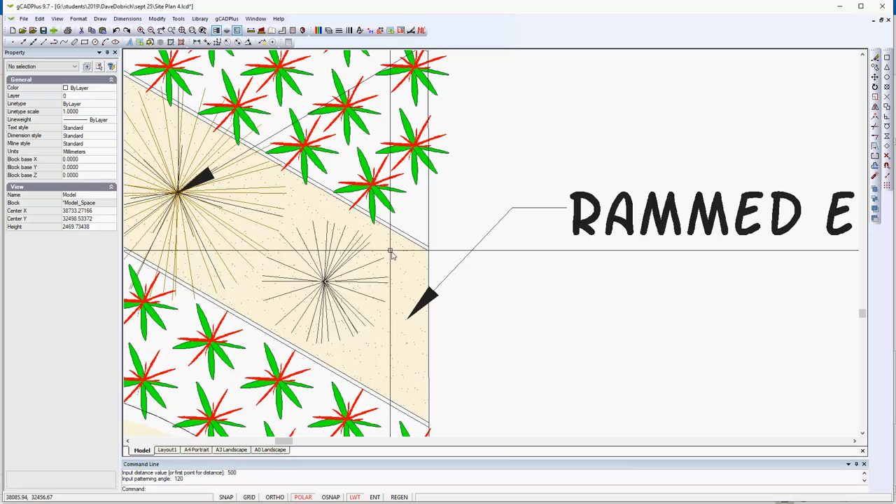Let me just check this line. It's actually an angle of 150. So if I wanted my patterning angle like that, I would have needed to change that patterning angle, but I digress.

We want to put patterning in the spaces between the rammed earth filled, crushed dirt filled zones, and that leaves us with several zones that are a bit awkward to fill.

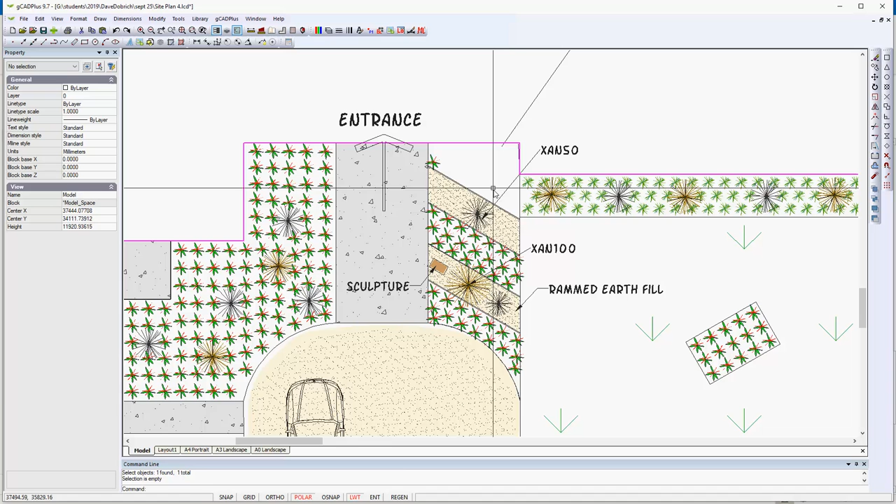What I'm suggesting is that rather than use that tool to pattern quickly, you might want to turn polar on. Let's look at the drafting settings.

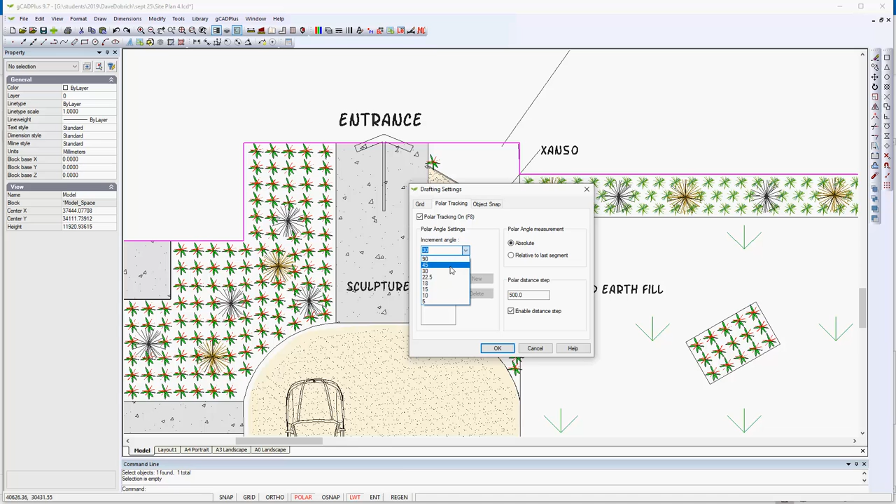I've set a polar distance step of 500 and an increment angle of 30. It gives us a lot of angles in there. We can add others, but let's just set it at 30 degrees.

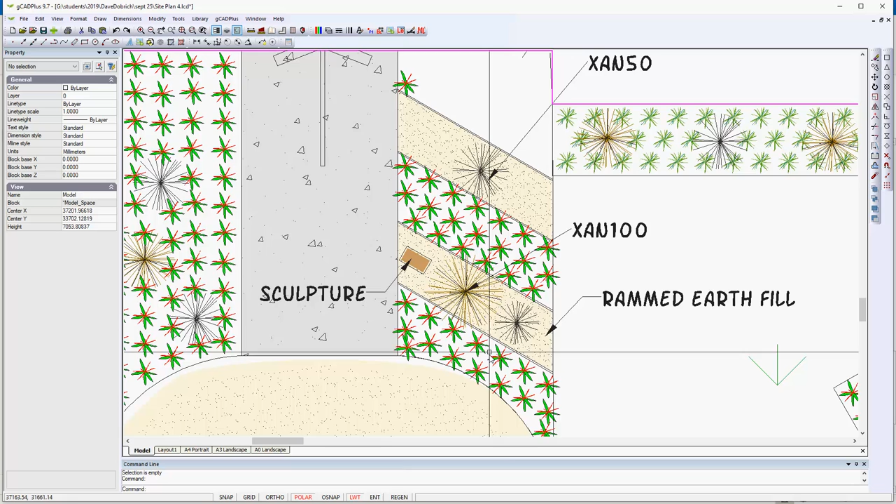What I can now do is zoom in on this space rather than draw a polyline around what is a little bit complex. That space is not too bad, but the area below here, I'd have to use a polyline with the arc option in order to fill it, and that can be a little tedious.

With these settings for polar and a step size of 500, we can simply select that symbol and copy it, click in the middle and just move it in the direction we want, and click, click, click, click, and click. We are popping that planting in a zone like so, and they're 500 apart.

I'll check that in a moment, but I'll select that lot and copy that lot up here and to there and to that point there, and then it's just a matter of removing those symbols that are outside the zone of interest. So we'll delete those.

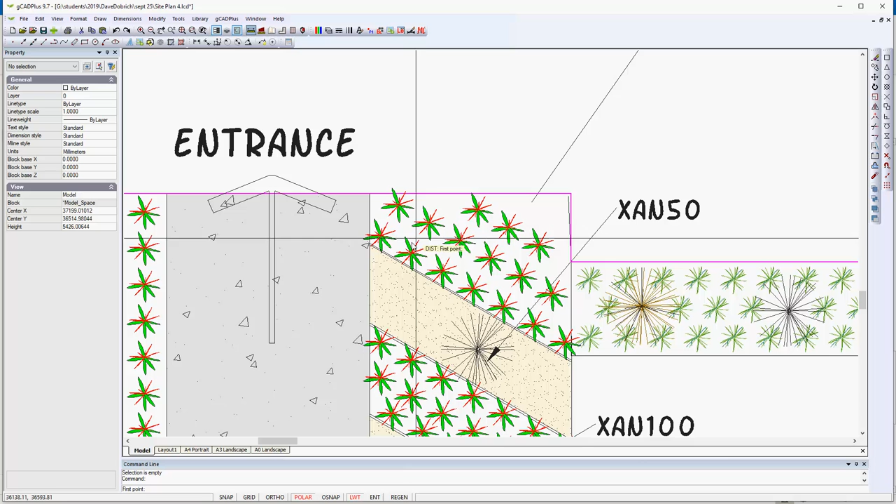So there's our planting done. Let me just check that when we go from there - we want the distance command, from the center there to there, 500 is the distance. So there's the planting done.

So we can populate a space with planting at the correct intervals really easily using those polar settings.

Well, of course, we can save drafting time by using the mirror command. So if I select all of those zones like so, we'll hold our shift key down and remove that arc from the selection set, and also remove a polyline which is encompassing the area there.

We can now right click. I think I'll remove those because we've put some Xanthorrhoeas in different places on the left hand side. So now I can right click and select mirror, and as my mirror line I can pick the center of that line there, and I'll just make sure with copy, and we do that.

And there's our zone of planting in, and it's just a matter of adding a couple of extra lines to the end of that plan. You could even maybe leave the sculpture plinth there.

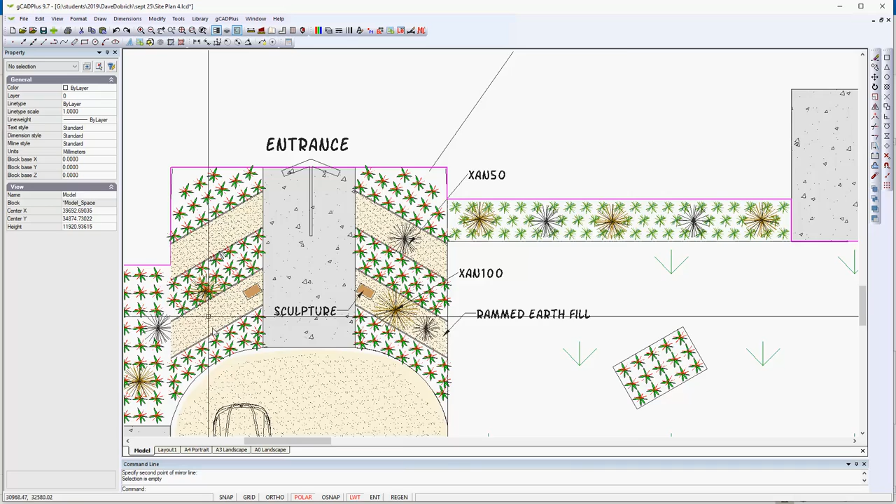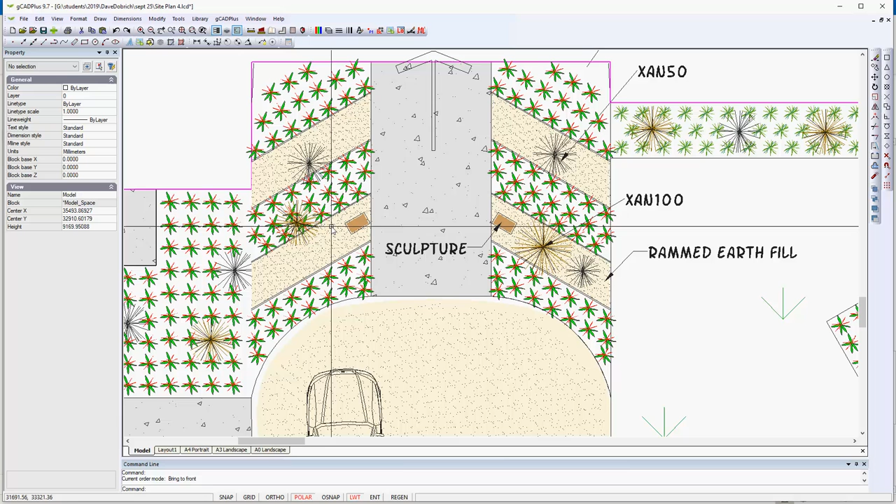That one should come to the front, and this one should also come to the front. Bring it to the front, and there we are. So that's a very quick way of doing some planting patterning and using the mirror command.